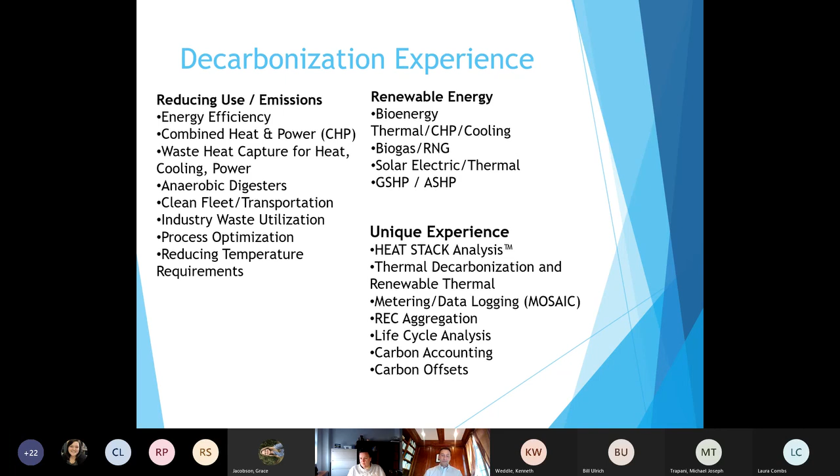So we have a pretty broad experience, and we don't represent equipment or anything like that. So we're completely agnostic on types of technologies, and really our job is to help folks find the best option for them as they go about their process of decarbonization when we're doing that work. So that's a little bit about us and our background.

Now, a quick outline of the presentation. I'm going to start by getting into very briefly the emission scopes so everybody's on the same page with that and why it might matter to a business. I'll spend the bulk of the time on the presentation talking about thoughts about how you would decarbonize. Scope 1 is what I'll focus on mostly because that's kind of the hardest for an industrial facility usually to decarbonize. But Scope 2 as well a little bit.

And at the end, I'll get into some tips or thoughts we have, having done this for a while, that you might find valuable as you go about your process of decarbonizing your facility. So just very briefly on the scopes themselves. Scope 1 emissions are direct emissions by your business at a facility that you control. And so a real easy one to conceptualize here would be a natural gas boiler. The emissions out of the stack from that at your facility that you own are ones that fall into Scope 1.

Scope 2 is indirect emissions from energy purchases, usually going to be electricity. And so a real obvious one there is you purchase electricity from the grid and there's a power plant somewhere else that someone else controls that's emitting. You have to own part of those emissions. And then Scope 3 is upstream and downstream of your business. So think supply chain and distribution of products. And again, I'm going to focus mostly on Scope 1 and a little bit on Scope 2 today.

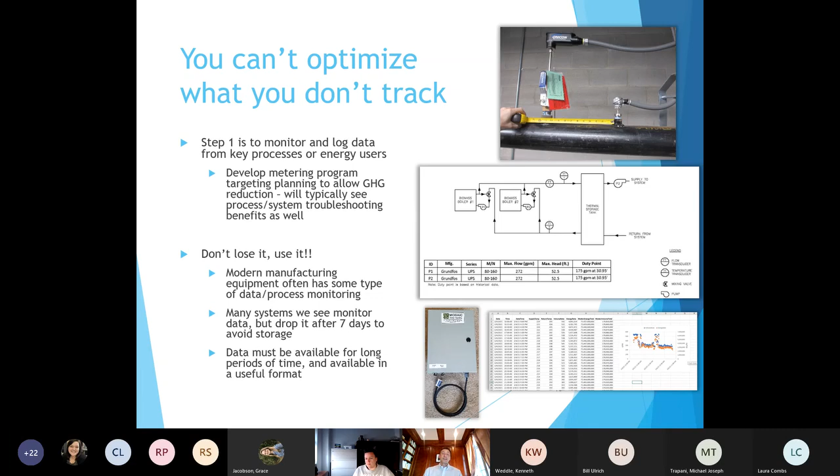It's pretty interesting. We go to a lot of facilities, and there'll be maybe one guy who knows how to get some of the data, and they're on vacation usually when we show up somehow. And then other folks aren't quite sure what they actually track, but they can probably tell us when the guy gets back. That is not a problem mostly for folks in how they run their facilities now, if you're working that way. But if you really want to decarbonize, that kind of thinking process in terms of how valuable that data is something we would suggest thinking pretty hard about.

We've shown up enough and run into those types of situations that we have developed our own kind of data tracking system to help people with this. We have used this with our own clients for quite a while, and then we realized maybe we should sell it. But it's essentially a box on a wall that has a computer in it that pulls in data from a bunch of different formats, puts it to our cloud, and then we provide it back to the facility in a way that's easy to manage and analyze for them.

That is metering in general. Just some quick thoughts on that. And again, that is a really key aspect, and you really need a metering plan for your facility, most likely, if you're going to try and really tackle decarbonization.

Now I want to get into Scope 1 emissions and how you might think about reducing that. The thing about Scope 1 is typically, not for every facility, you might have a fleet that you own and control, and that might be a pretty big source for you. But a lot of times thermal energy at a facility is your Scope 1 emission. And the reason I'm focusing on this in the presentation mostly is that this is really the hardest one we see for industry to tackle in a cost-effective way or in a holistic way.

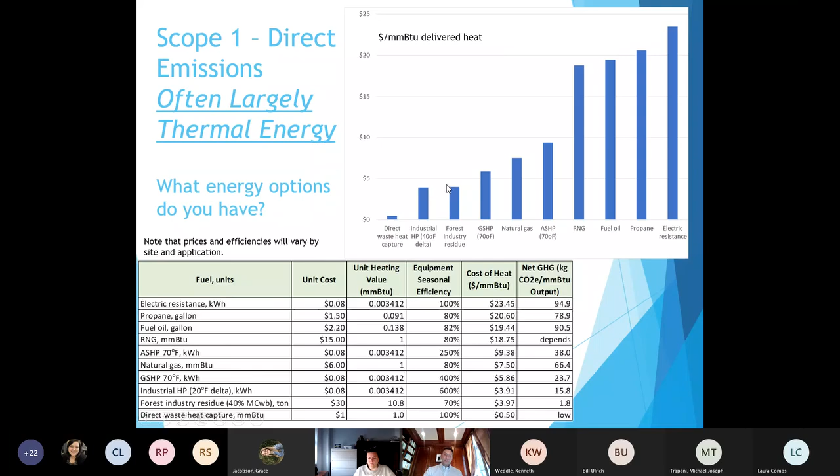But most of these down here that are lower cost have an issue associated with them, and that is they can really only serve a certain temperature profile for a facility. So if you hear about electrification of thermal loads, that can be a really good opportunity for a lot of facilities. But we like to use the term beneficial electrification or something like that, because not all electrification is good electrification.

Right now, if you were to take electric resistance, convert your natural gas use for high temperatures, and use electric resistance in North Carolina from the grid to do that, you would be emitting more carbon by almost double, not quite double, per million BTUs. So maybe you don't want to do that just yet.

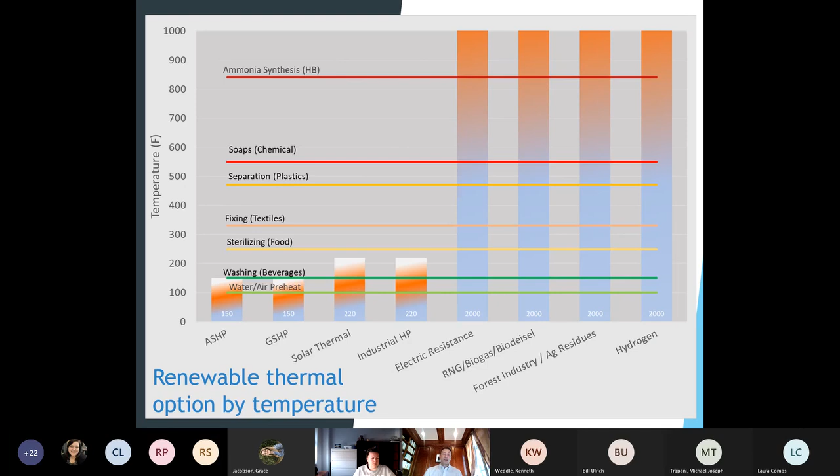I'm going to spend quite a bit of time talking about temperature now and how it impacts Scope 1 and some ways that you might think about it and approach it for your facility to help drive decarbonization. Now, if you look at temperature across all manufacturing in the entire US, around 30% of thermal demands that we meet in manufacturing in the country don't require anything more than 212 degrees.

But a lot of the facilities that we work in, folks are meeting these lower temperature needs with the same steam that they have, or other process heat source that they have that's really maybe 400 degrees, something like that. And that's not a problem. In fact, there's a lot of good reasons to do that. But if you're trying to decarbonize, we're going to show you why maybe that's something to rethink.

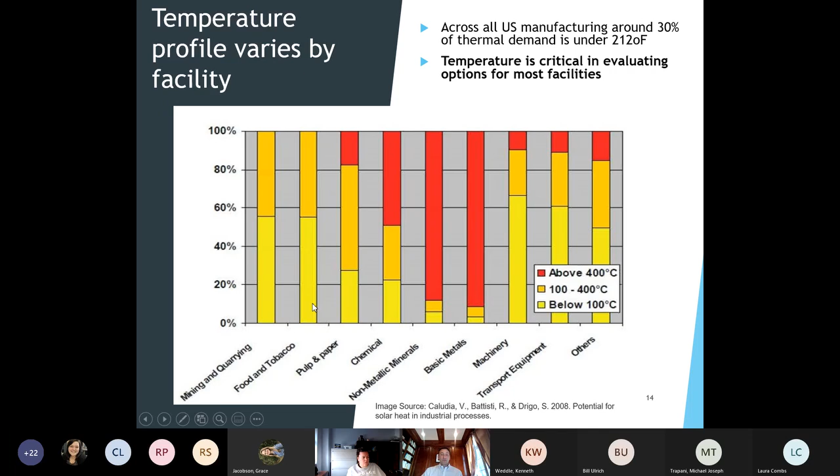And here are some other industries. This data is getting a little bit old, but it probably hasn't changed much. You can see some industries that tend to have bigger portions of their energy demands able to be served by lower temperature energy sources.

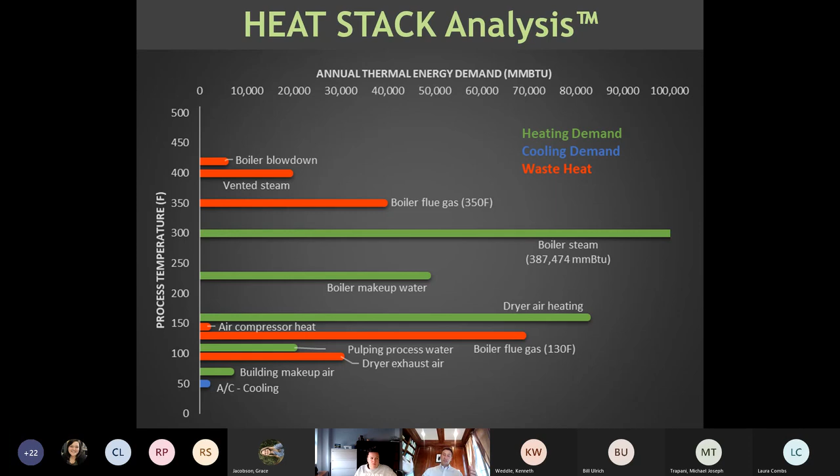And so if you're bringing in this water from a river and it's 45 degrees, you can actually stuff quite a bit of heat into that pound of water prior to being 227 degrees. So really you could serve a bunch of that load at a lower temperature as well. So anyway, these are the temperature profiles we picked for this facility. We took 25% of the natural gas use that we have at the facility and said, all right, we can serve that with something that's a lower temperature.

Now, because we've been able to look at this heat stack analysis and we see at what temperatures we have different heat sources and how much on an annual basis in terms of million BTUs we've got, we can figure out that, all right, now we can capture some of this waste heat and stick it into these mass flows coming into the facility to essentially preheat them before they hit the process and our boiler steam.

So by doing that, this facility, it works out to around 18% of the total energy of the gas use we can just get rid of, because we can capture waste heat from the facility and use that to preheat lower temperature things and stop using 18% of the steam at the facility, or natural gas at the facility, just off the bat.

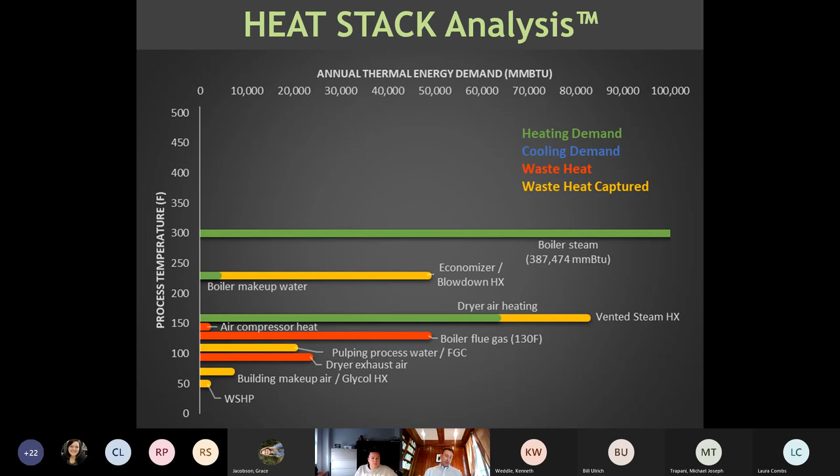The other thing we've done now, because we've looked at this as more of an optimized way, is that we can see we still have some green here that we need to heat. Looks like here's some drier air. And we can do that with lower temperatures because that needs to be about 170 degrees, 160 degrees, it looks like. Now we can look at these options. Which ones are renewable? Which ones have the lowest greenhouse gas emissions? And which ones have the lowest cost? And now we're playing in these options down here to try and get at that.

Now we still haven't captured, 75% of the energy in the facility is still boiler steam, so we still have to tackle that. But we've done quite a bit of good for ourselves, and we can get a lot of this done in a way that saves us money as opposed to costing money. So if you want to replace your natural gas use at the facility for the remaining 75%, now you might be looking at something like renewable natural gas, which in pretty much all cases is going to 2-3x or more your spend on natural gas on a per million BTU basis if you want the renewable version of that.

Now, again, we have opportunities like forest industry residues and things like that we can look at that can possibly save us money and be more of a silver bullet for us. But this general approach is one that we think is important if you're really going to try and decarbonize in a way that's cost effective for your facility. And I'm going to spend more time talking about temperature. So it might become ad nauseam for folks, but I kind of enjoy talking about it. So we're going to talk about temperatures more and further, and why it's really valuable on a technology basis, by decarbonization technology, why it's valuable to have lower temperatures.

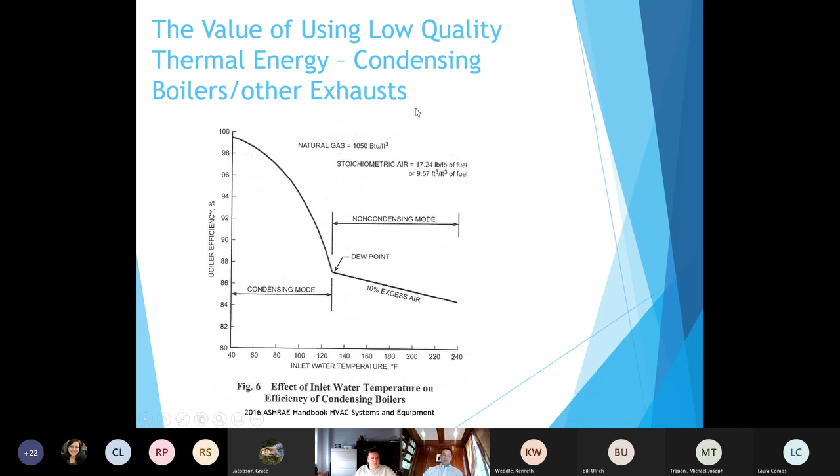So you can see, I can't remember if it was this one or not, one of the greenhouses we worked at, they started out and they wanted to use steam to heat this facility, which is no problem. You can do that, but in a new facility, you might not want to do that. And so we suggested hot water. So we started hot water at 180 degrees.

And then we said, well, can we design this facility that needs 78 degrees inside of it? That's what our goal is. We need to hit that, to use something other than 180 degrees to heat air up to 78 degrees. And the answer is yes, we can do that. And it changes the design of the HVAC system for the facility a little bit. But look at the benefits.

If we can get 120 degree temperature, is what we're using in our heat exchangers to heat air to 78 degrees, that means our cost of energy is around $3 per million BTU with this heat pump system. If we need to use 150 for whatever reason, which maybe is a constraint, now we're at $5 per million BTU. So you can see pretty quickly, only in 30 degrees of temperature of supply, we've changed the effectiveness of this heat pump system in a pretty large way for serving this facility. So again, the temperature is critical.

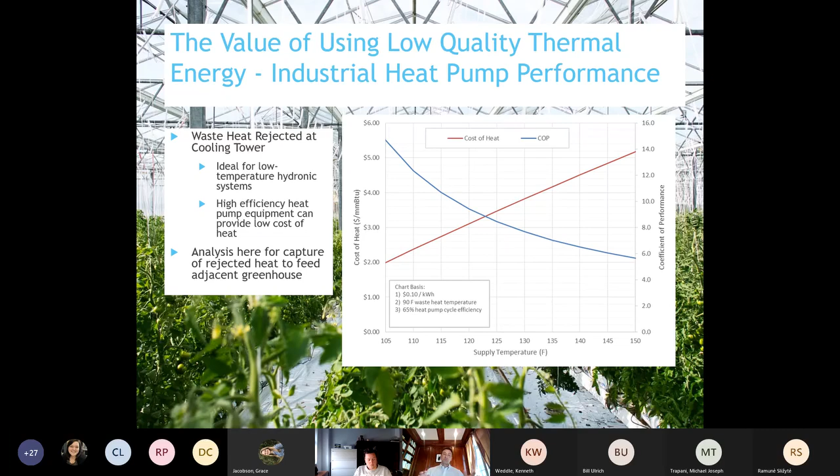So our best economics on a CHP system are if it's thermally led and we're leveraging all that heat, and then whatever electricity we get out of it, we get out of it in a very efficient way that's cost effective and helps your facility. That is all temperature dependent. So if you look at a combined heat and power system that's a gas engine, for instance, let's say you want 100 psi steam, so that's like 340 degrees or so. The portion of the thermal energy that comes out of that gas engine that you can capture is maybe 15% or so if you require us to give you 100 psi steam.

If you said, but I can do all this heating over here, preheating of things with 150 degree water, we can then give you 70 to 80% of the thermal energy available from this engine. And it's a much more efficient system overall. So again, it's really temperature dependent, kind of the viability of your CHP system. And that's not the only consideration. There's lots of CHP we've done where we have to dump some heat. I'm not gonna tell you we don't, but we're certainly trying very hard not to with how we set those systems up.

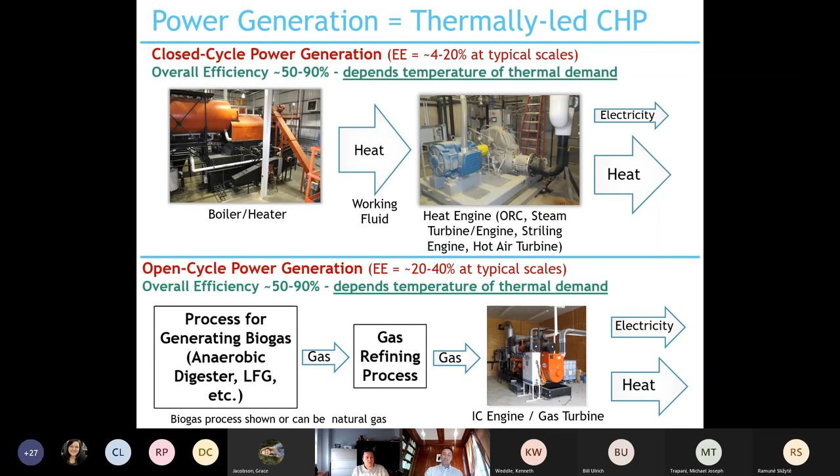One more thing I want to mention: I've started to shift between scope 1 and scope 2 a little bit here because we're doing some electrification with that industrial heat pump, where we're taking thermal energy out of the facility, so that's reducing scope 1 emissions, but we're using a little bit of electricity, so we're increasing scope 2. Talked about CHP. Another one that kind of bridges that gap or spans that is thermal chillers.

And these have been used in industry for a very, very long time. Usually you see them where you have high quality thermal energy that's wasted, and you have some fairly expensive electricity and some cooling demand. And that can make them extremely valuable to facilities. And there's other reasons to use them too, for lots of other reasons.

But what's changed in the last 5 years or so is that you can really use some pretty low temperatures to drive quite a bit of commercially available equipment to provide this cooling. So with 185 degrees as an exhaust stream or a waste stream, you can do some pretty good cooling of something in your facility. And the scale that's available now is more broad, I think, than it used to be. So you can go down as low as 10 tons and you can go as large as you want.

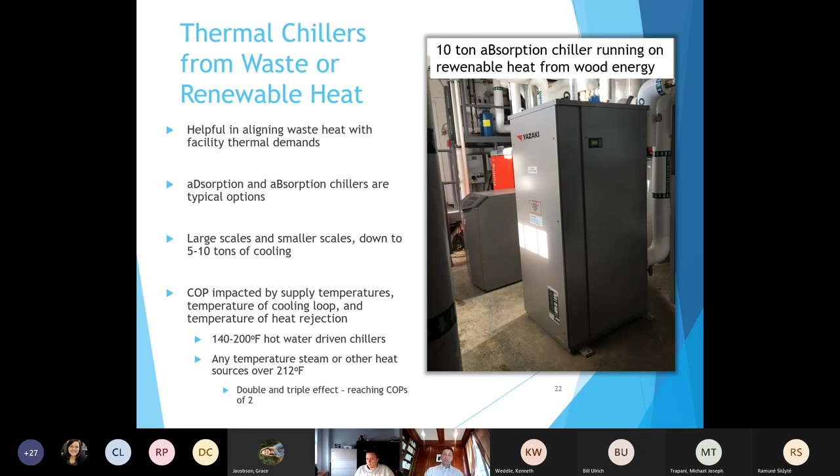But you can now use lower temperature energy that's a waste and really drive a cooling process to help reduce scope 2 emissions at your facility. So I started to dip into scope 2 a little bit from scope 1. Just going to touch on this briefly, and clearly it's very important because at many facilities, greenhouse gas emissions from scope 2 from your electric purchases are the bulk of your greenhouse gas emissions.

So clearly very important. One thing I would say is that at most facilities, whether they've done efficiency or not, there are more energy efficiency projects you can do. The real question is, are they economically viable? And so that's really the threshold that usually tips what efficiency projects you can actually do versus which ones you can't.

The other thing I'll say is that now's a good opportunity to start to seek chances to capture waste heat and do waste heat to power. There's a new tax credit that's available that's making that more economically competitive. So if you have particularly high temperature waste heat, you can capture that, make power. And if you can segment out some lower temperature needs, you can also take the energy out of that prime mover that was waste and that's lower quality now coming out, and maybe offset some of that scope 1 emissions as well with that.

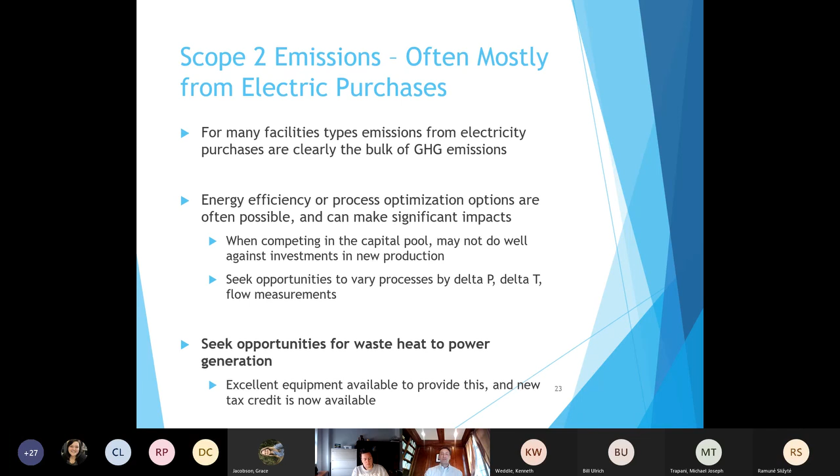But the reason I focus less on scope 2 emissions overall is that increasingly you have an option for market-based ways to drop your scope 2 emissions. So depending on the state you're in and which utility you have, it can be somewhat easier or not as easy to come up with a market solution for that. And in a lot of states, we're seeing fairly cost competitive electricity that you can tie through contracts to be renewable.

The one thing you have to watch out for with that is that if you look at the greenhouse gas protocol and how the accounting works, you have to report on a market basis if you want to do that, as well as a location basis. And so you can kind of infer that the reason for that is if you're buying some cheap hydro from somewhere in the country through contracts, but you're in a grid that uses a lot of coal still, at some point in time, it might catch up with you. Currently, the contracts take care of it, and the market-based solution really works for folks.

And so that's why I spent less time on this, is that the grid is becoming greener over time, and there's a lot of government subsidy and policy already focused on getting the grid greener. So hopefully that happens over time, and it's one less thing for an industrial facility to have to worry about.